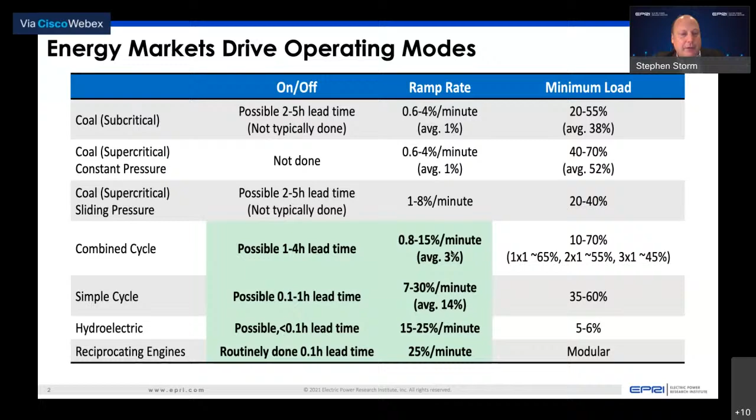So when you're looking at the energy mix in the portfolio, and if you do not have these fast start gas turbines, hydroelectric or reciprocating internal combustion engines to basically assure the grid is stable, to be able to meet those 1 to 4 hour lead times for startups and shutdowns, to be able to operate with extremely high ramp rates up and down, then we really put a lot of pressure on the fossil plants and the conventional coal plants to be able to prevent instabilities in the power grid, and how you manage those assets is very important.

The next thing I want to talk about is, again, I mentioned that boiler tube failures are a leading cause for plant availability losses in fossil plants, but the overall reliability of those plants is really influenced negatively by the number of startups and shutdowns. And a lot of those startups and shutdowns and the failure mechanisms that arise from boiler performance are at the mercy of plant operators. And so some of the common operational challenges include how you manage those high ramp rates, poor control of the temperatures, poor control of drum levels, pressure and temperature control and whatnot.

And all the damage that you accumulate on a large utility boiler is accumulative. I have yet to find any unit that was self-healing. So I think it's important to understand that all this damage is accumulative, and it's important to understand that you have to have a comprehensive mitigating strategy to prevent premature failures of major components.

So as you're going across the load range and you look at the demands on those conventional coal plants for dispatchable generation, you've got to be able to meet those grid stability demands by being available, being flexible, and that flexibility might not be online operation. That might not be how quick you can ramp up or ramp down or what your minimum turndown is, but it's also your availability after you come out of a short-term layup or an extended wet layup or a dry layup. But for these different modes of operation, there's different requirements for the plant staff. And I think it's important that you understand that each one of these modes of operation comes with a defense strategy that includes O&M activities that are critical for ensuring boiler reliability.

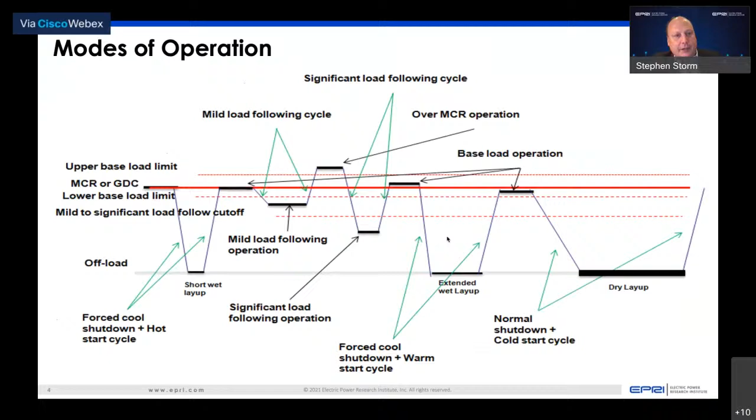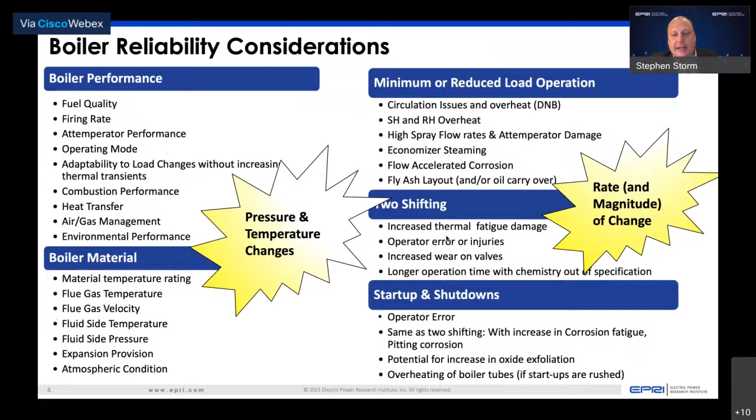So pulverized coal combustion, as anybody that knows me knows, that's near and dear to my heart. And all utility boilers, pulverized coal-fired units, which are predominant in India for generation, are fixed with a limited amount of furnace residence time for combustion to take place, typically less than 1 to 2 seconds. And within a microsecond, you release the volatiles in the coal. And as anyone in India knows, there's very little volatile to begin with. So you've got to get combustion right. Combustion is a major influencer on heat transfer optimization, and it plays a big role in operational flexibility.

So, as you drop load and you deal with low volatile, high ash coals, forced ignition points and how you modulate mills into the configuration and how you control excess airflow and issues such as air in-leakage are very important. They have very much of a negative influence on combustion, and it can not only impact the boiler, but it can impact the turbine side.

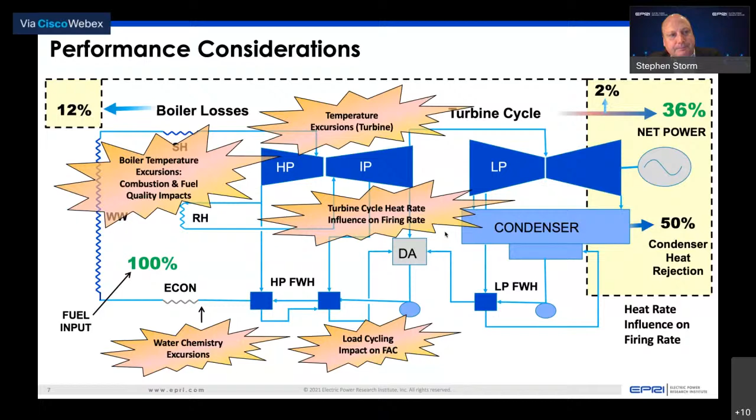So management is typically one of the top areas for control improvements. It's a very important area. Regarding pressure and temperature control, combustion and boiler performance, once again, play a big role in that. The controls are very important, but there's also a lot of subsystems. When you look at the air systems, the gas systems, the fuel systems, and how you manage those different controls that modulate those different subsystems.

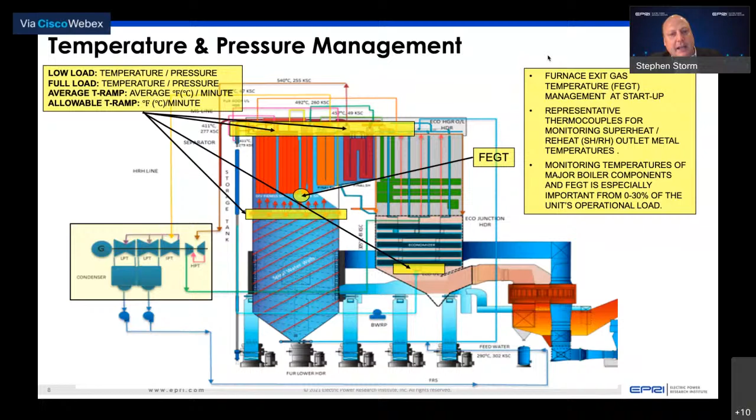And depending on the mechanical integrity of dampers and burners and pulverizers and how good of a job the firing system is doing for ensuring that we optimize lower furnace heat transfer, is going to have a big influence on the magnitude of those temperature and pressure swings, which are top drivers in regards to the life expectancy of thick-walled pressure vessels. We can see issues with boiler terminal tubes that tend to suffer from thermal and pressure-induced fatigue issues. And those issues are again related back to combustion. They can be related back to human error, and it goes hand in hand with operational best practices and how you manage the procedures as you go up and down in load.

One of the top areas, I know a lot of the Indian power plants, because of the coal quality, have struggled to operate with less than 50% load. I know there have been some burner studies where you've been able to prove for a short amount of time the ability to go down to 35, 45% MCR in my understanding, but due to shear bar wear and burner degradation over time, the sustainability of reduced low load operation is going to continue to be a challenge in India. So it's important to understand how you manage that heat release.

When you operate in that 0 to 30% load range, this is what I sometimes call the valley of the shadow of death. We have reduced pressures, we have reduced differentials on the superheat and reheat, and we find ourselves more susceptible to circulation issues or any issues that you might have with exfoliation in your U-bends or your superheat and your reheat, because overheat scenarios or flame impingement or heat flux variations in the furnace walls can result in a short-term failure mechanism. And of course, those short-term overheat situations can turn into long-term overheat or failure mechanisms that don't show up for many months down the road. A lot of those failure mechanisms remain latent for a long period of time.

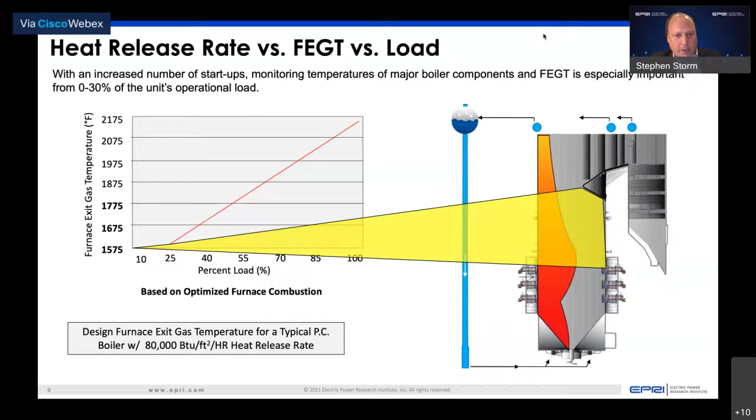So although you might find yourself flexible for a year or two, in many cases, what we've seen with large utility boilers is that over the first 2-3 years operating with high ramp rates or reduced levels of minimum load operation, you may not see DNB failures or overheat failure mechanisms show up for some time. So it's important to keep a focus on those potential failure mechanisms.

That being said, I've always been a proponent of the inputs and making sure that when you are pursuing a combustion or a boiler performance preservation program, you need to take into account the firing system, the firing system being the pulverizers, the fuel lines, the distribution, how you manage those excess O2 curves, how good of a job you're doing with representative O2 measurement at the back end. And that's extremely important at low load operation, making sure that we meet those NFPA requirements to minimize the possibilities of explosions or ash layout, issues that can have a negative impact not only on boiler reliability, but also on environmental controls equipment on the back end.

With large utility boilers cycling more often in India, and when you have domestic fuels with 40% ash coal, you already have issues with air in-leakage, with accelerated fly ash erosion on major components of refractory and penthouse seals, expansion joints, and so forth. But as you cycle on and off, and the boiler modulates as much as 6 to 12 inches or half a meter up and down as you take the units on and off, you're going to see more issues with the possibility of air in-leakage.

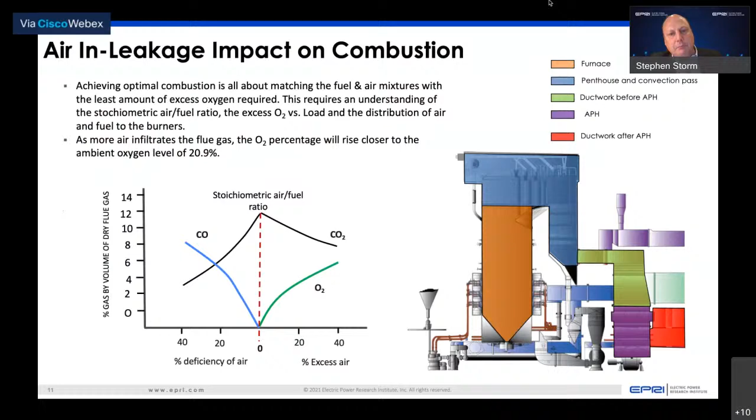And that creates challenges with meeting that load range going forward. So I think the best way to evaluate that as a best practice is to do a periodic boiler performance evaluation where you're monitoring the heat transfer on the unit. You understand when there's a shift in performance. You do periodic testing and requirements.

You understand the different materials as you go from the furnace walls to the superheat, the reheat. As you know, you're going to have material changes. And those different material changes are going to vary for your castings, your components, your boiler tubes, your refractory, the metal casings, your access doors. You're going to have different expansion rates. You're going to have different challenges for different materials.

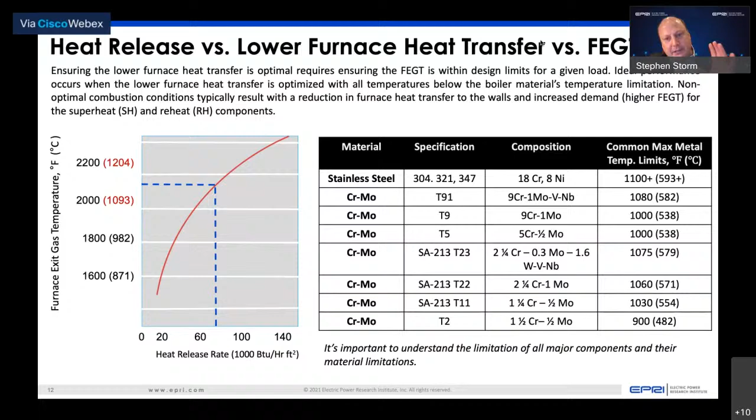So understanding what those metallurgical limitations are, understanding what your performance is, where your heat absorption path is, and then also understanding what's going on with chemistry. Understanding when you have chemistry upsets and you have tube deposition internally on the tubes, it's important to understand that startup overheating of those boiler tube components can be related back to the oxides that are inside a superheat and reheat tube, because they expand at different rates than the material itself, and so that can really drive failure mechanisms on those major components.

Starting up and shutting down more. If you have an event where you're in a peak of summer or peak of winter, India probably has more peaks in the summer than the winters because they're much more mild than some of the climates in other parts of the world. But the more startups and shutdowns that you do, if the operator runs the ID fans for an extended period of time, or if we start pulling off hatches on the boiler after you shut down and you force cool the unit, you can run into situations where you really drive condensate buildup that can create a water plug in a superheat or a reheat tube.

And then when you come to start back up, you can not only start up and have poor circulation and exceed the metallurgical limitation of that component because your FEGT is higher than the design of the tube material. But if you have condensate buildup and you don't monitor that FEGT and you don't control those gas temperatures until you evaporate off that condensate in those U-bends, then you're going to result in a very short-term failure mechanism.

So it's important to have gas temperature measurements on the unit, as well as understanding what's going on with those components. We've seen a number of issues with cyclic operation where you can have these water migration events, not only on boiler components, but also on turbine water induction. But looking at boiler components only in this presentation, it's important to understand that these rapid temperature cycles can lead to high strain ranges in borehole surfaces near the mid-wall thickness of headers, as I'm showing here.

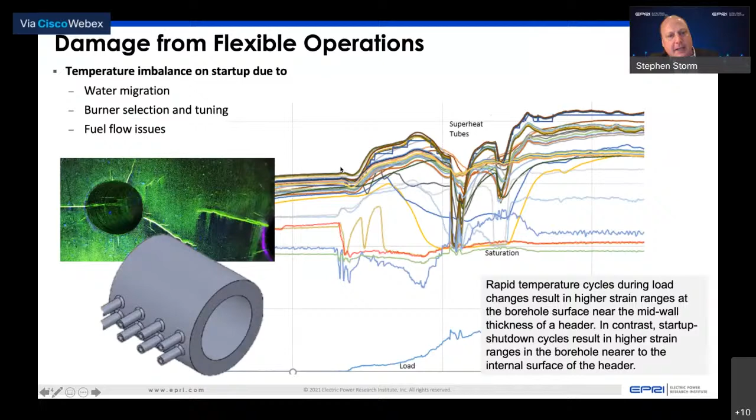And then when you're looking at life, and John and Justin may have some comments on long-term maintenance activities, but when you're trying to manage uncertainty and you've got units that are 30 or 40 years in age, there's a lot of uncertainty about the end of life of the units and what kind of damage may be done to major boiler components. In the US, it's not uncommon, if you have to do a major header replacement, for it to be anywhere from $5 to $20 million US dollars.

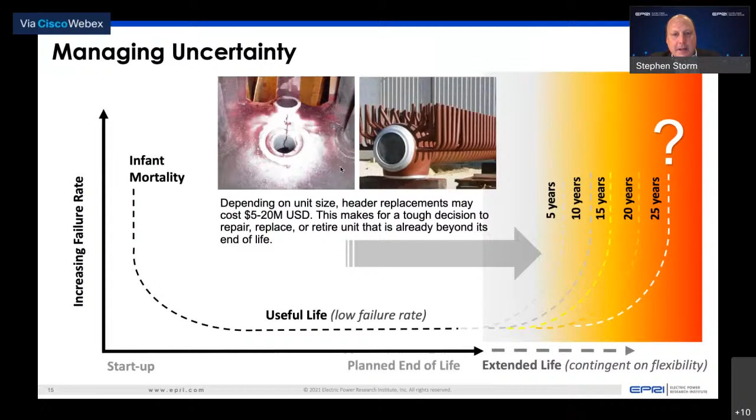And if you've got a unit that has already been through 25, 30 years of the original planned life, and it's going to only operate for 3 or 4 or more years, it may be very difficult to justify the repair cost for that failure mechanism. So it's important to understand these failures, what are all the precursors to those potential failure mechanisms, and what are all the variables that relate back to it. So I can't stress enough the importance of having representative thermocouples across the system. I can't stress enough the importance of optimizing combustion and boiler performance and having good pressure management on the units.

But all these different systems align to control the steam temperatures. On the subcritical units, these are more prone to having issues with drum level control and catastrophic damage when you drop down to reduce loads, or if you have more startups and shutdowns, you can have issues with shrinking and swelling of the water levels due to heat flux and what's going on in the combustion process.

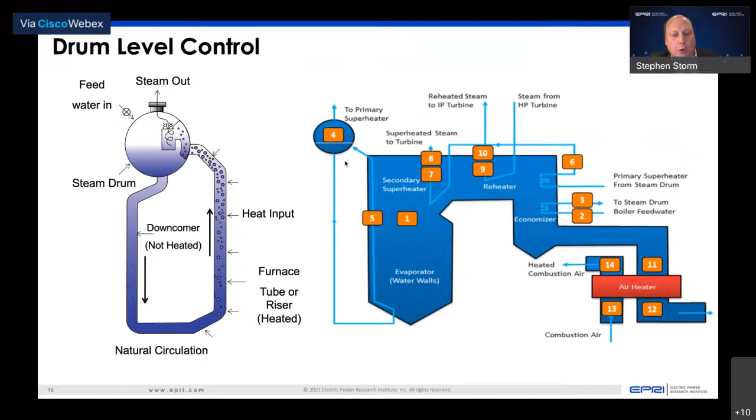So as you continue to drive closer to 50% load or even reduced load operations, it's important to understand what's going on from a circulation standpoint and how good of a job that your combustion is in the lower furnace by doing visual observations, doing periodic testing, and doing those prerequisites to be able to mitigate those potential failure mechanisms.

So when you look at something very common, when you get down below 30% MCR, we've seen a lot of issues with departure from nucleate boiling, where you have steam film formation. On top of any potential scale or deposition that you have from water chemistry upsets, you can also have a temperature differential from the film formation from having a high heat flux region where you have DNB. So it's important to understand that a lot of those failure mechanisms are related back to combustion.

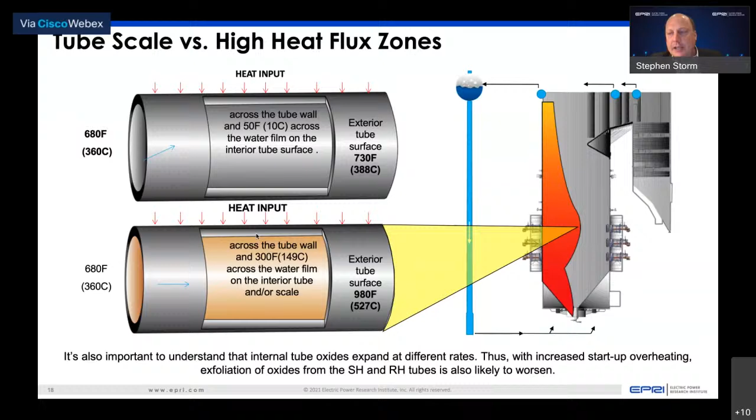And then when you look at the deposits in the tube, I'll just give an example here on a subcritical unit where you might be designed for 360C on the inside of the boiler tube. But if you have a significant amount of scale on the inside of the boiler tube, that can create a temperature differential of close to 150 degrees C, where now on the exterior of the tube surface, because you don't have the saturated steam cooling on that subcritical boiler, you might start hitting 980 F or 527 degrees C on that tube wall. And if that's a carbon steel tube, that's going to result in a short-term failure after a very short amount of time. So it's very, very important to understand those heat fluxes.

And then it's also very important to ensure that you have optimal stoichiometry at the furnace exit. Anybody that's ever done a high velocity thermocouple probe test, where you use a water cooled probe, you check the O2, you check the temperature profiles in the boiler, can attest that it's not a fun test, but it's certainly a best practice that should be considered annually or semi-annually to ensure that you've got the proper amounts of oxygen and that your lower furnace heat absorption is where it needs to be.

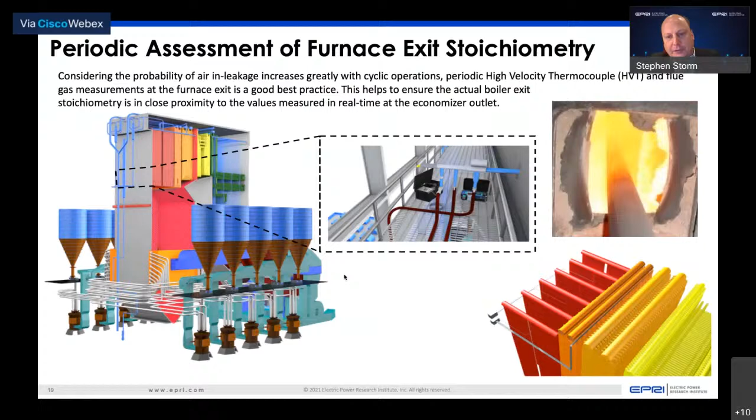And then in regards to real-time management, integration of infrared or acoustic pyrometer systems is well warranted, so that you understand any potential change in the performance over time. As you change those temperatures and pressures in the boiler, if you don't absorb the heat in the lower furnace due to air in-leakage or flame stability issues, or just poor absorption in the lower furnace, which relates back to combustion, this can drive those furnace exit gas temperatures up 150, 200 degrees C beyond the temperature limitation of the ash fusion temperature.

And then with high ash domestic Indian coals, it's also important to understand that there's an exponential impact on the velocity gradients of the fly ash accelerated erosion mechanism that relates back to those temperatures, because you didn't absorb the heat. So not only do you have to absorb more heat in the superheat and reheat to meet the turbine inlet demands for steam temperature and pressure, but you're also going to find yourself with accelerated erosion, accelerated plugging, and increased heat absorption on the superheat and reheat, which is going to shorten the life expectancy of those major components in the upper furnace.

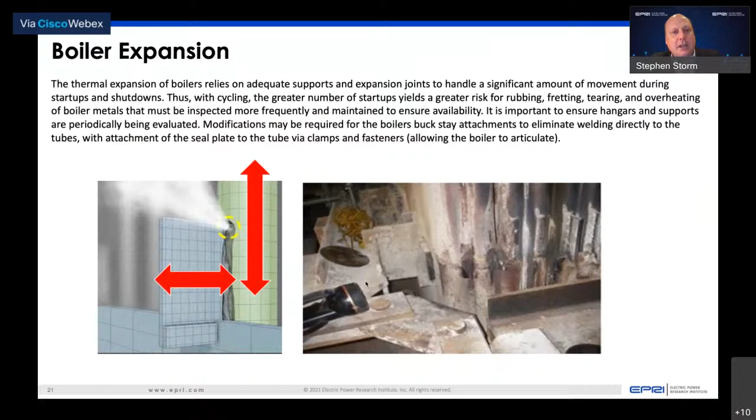As that boiler goes up and down with cycles, when the unit comes on and off, the boiler relies on adequate supports and expansion joints to be able to handle that significant amount of movement. The boiler needs to be able to articulate around buck stays. Any attachment points that are fixed or unable to modulate are going to exacerbate issues with fretting and rubbing and tears and things that result in boiler tube failures, like I've illustrated at the bottom left. But this can also relate back to exacerbating corrosion fatigue at attachment points, where you also have issues with a boiler that's, say, over 30 years old, and it's all of a sudden cycling more at low load operation.

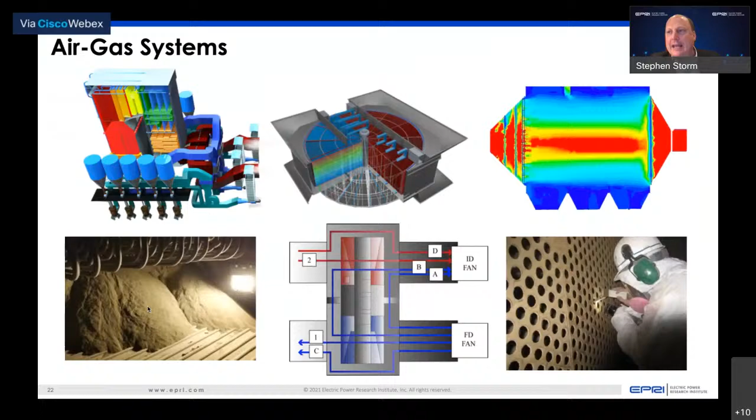So I always look at the firing system as the heart of a coal-fired unit, but I look at the air system and the air heaters as kind of the lungs of the unit, ensuring that we have good differentials, balanced pressure drops, uniform gas flows and temperatures. That's not only important for boiler reliability, but also for optimization of your electrostatic precipitators, ensuring adequate velocities to sustain ash particles and avoid issues with high ash coals like we've seen in India, where you have deposition in localized areas, whether in the upper furnace, the convection pass, or the horizontal ducts leaving the boiler. Ultimately that's going to impact gas distribution in and out of the unit from left to right side, and that's going to impact the dynamics of what's going on in the combustion process on the front end.

So I briefly mentioned... Mr. Stephen, could you now try to wrap it up? I can wrap it up.

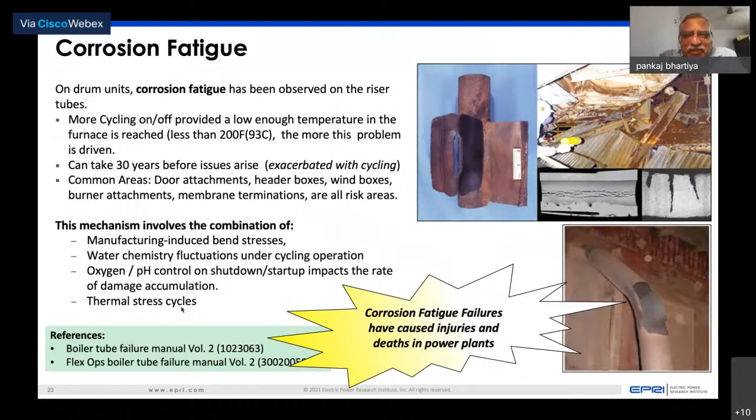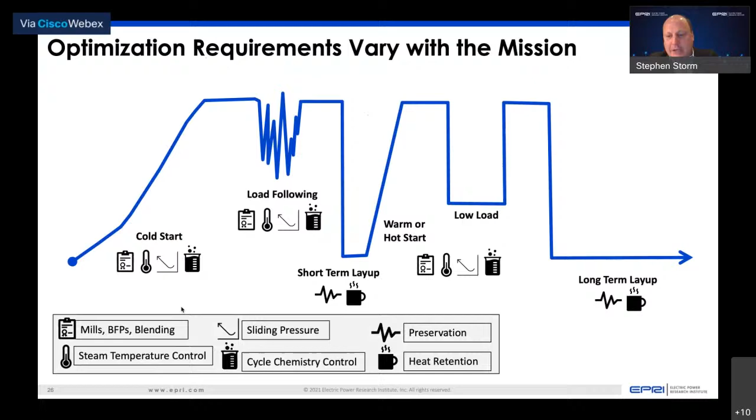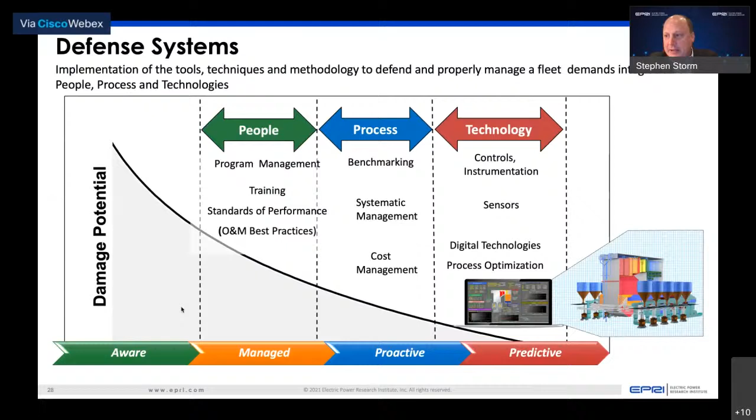So I talked about corrosion fatigue earlier. Flow accelerated corrosion is something that modulates with low load. We find ourselves more susceptible when we drop down to that 150, 180 degrees C range. And then cycle chemistry, how you manage it online and offline, is very important. So I'll wrap it up, Pankaj, with saying that under these different modes of operation, there's different requirements for each one of those modes. There's a lot of different subsystems that need to be taken into account. And it's very important to have defense mechanisms for aligning your people, process, and technologies. And I know in Program 223 this is a key focal point for us. So anybody interested in learning more, please reach out to myself or Paul Pickering, our India representative. Happy to share more separately.

Thanks, Pankaj. Thank you, Mr. Stephen. It has been a very comprehensive assessment of the Indian boilers, which you definitely have done hands-on. It is a good learning from the perspective of flexible operation. And as you rightly say, people, process, and technology all have to be put together to address this issue. The points which you have raised regarding the controls, the ramp-up rates, the metallurgy, the operation optimization, and the tracking of temperatures - metal temperatures, gas temperatures, and the fire completion temperature - these are all the major issues which we need to monitor in order to be confident about the lesser adverse effects of flexible operation. Thank you so much. Thanks, Pankaj.

Thank you. So now I would like to invite Mr. Coffey, who is going to talk on the O&M best practices. Please, sir. Thank you, Pankaj. Happy to talk to you guys today. If you could pass the presenter ball over to me, I'd be very happy with that. Mehul. There we go. Thank you.

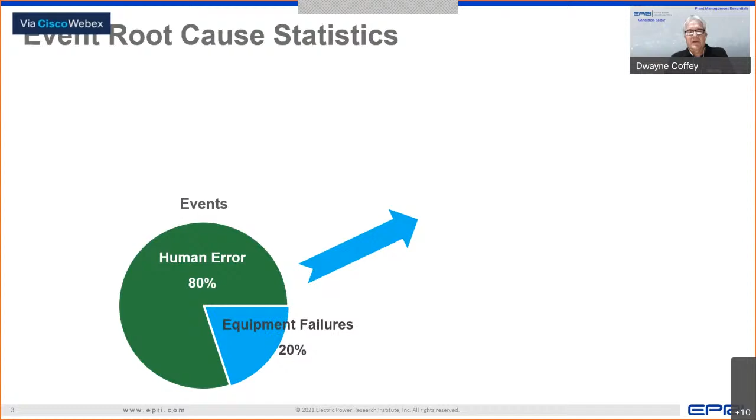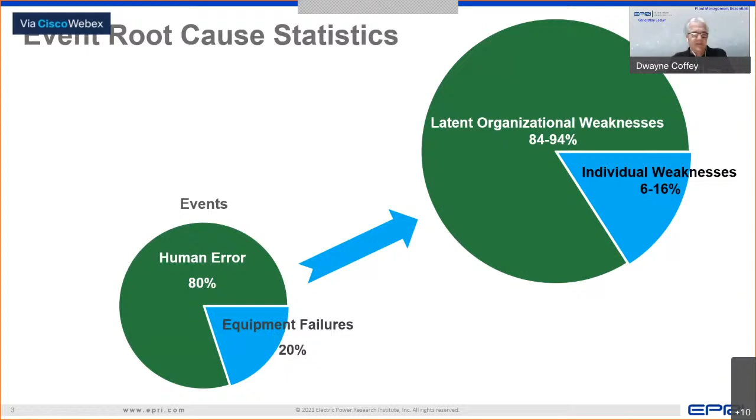A lot of latent conditions exist in these human performance situations, and that's really what we're going to talk about. If you look at industrial event root cause statistics, where people have figured out why events happen, 80% of it is human error. I know Stephen's real passionate about the boiler, but equipment failures are really only 20%. Most of these events are caused by human error. But when you look into the human error, you can't just stop at saying it's human error - you have to break that down into smaller details. And when you look at the human error, it actually evolves into this: you have latent organizational weaknesses. Your programs, your processes - those are the issues that are actually causing problems with your units. The individual human error is a very small percentage of that. So we really need to focus on the organization. The programs and processes you have in place are hugely important, because that's where the latent organizational weaknesses exist. And there's all kinds of examples - our industry is not the only one.

When you start looking at the latent organizational weaknesses, you're going to start looking at your process and programs and your organization.

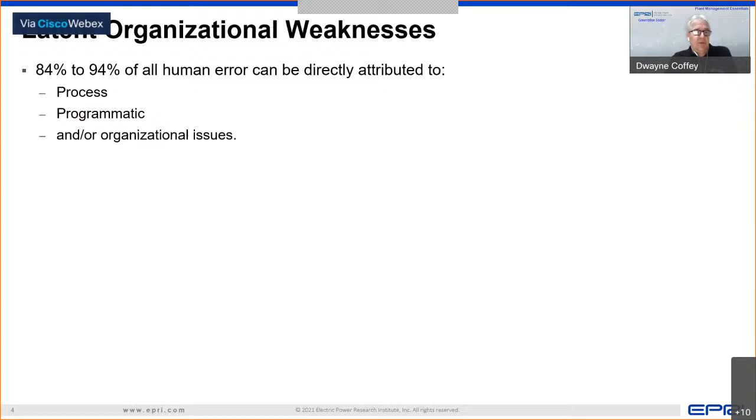In the U.S., we've had some big events of our own. The Space Challenger explosion was a latent organizational weakness.

Russia, the Chernobyl nuclear plant, obviously a latent organizational weakness. And then we've had this combined cycle plant that exploded during commissioning in Connecticut, the Kleen Energy complex, due to a poor process on your steam blows for your steam piping to clear the piping out. They were using natural gas for the steam blows just due to the environmental conditions and how they had it set up, so there was a pocket of natural gas that existed during the steam blow. It found an ignition source and exploded.

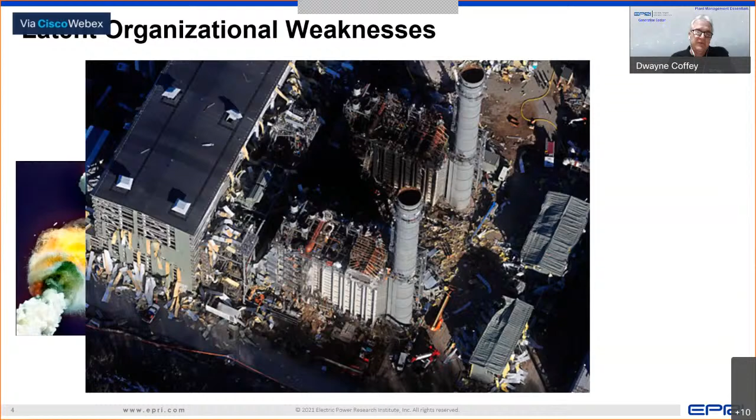My program looks at a lot of latent organizational weakness areas. Stephen talked about procedures - that's very important, one of the key opportunities. How you use those procedures, the use and compliance. We find out when we do assessments across the world, we're not as good at that as we should be.

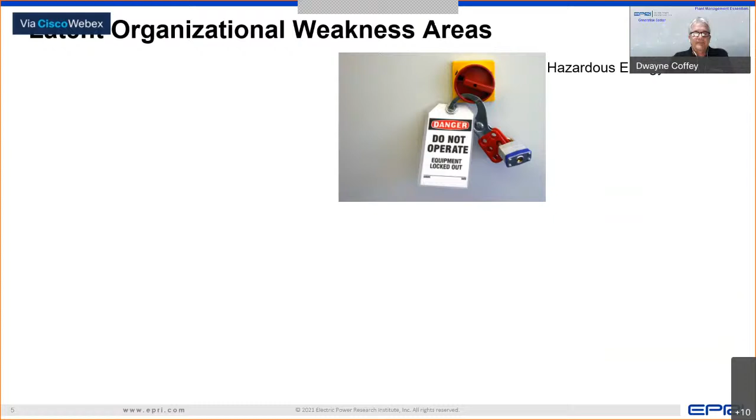Hazardous energy control, like lockout tagout. Making your operator rounds, like Stephen was talking about, the inspections of the equipment, really important.

And then we've moved into the technology, DCS. So our DCS alarm management, we find everywhere we go around the world is poor. That's well beyond what a human can actually perform. We'll talk about that, and then just a look at the graphics.

These graphics are great if you're playing a video game. They're horrible if you're trying to run a power plant. And we see these graphics everywhere. I was at a plant doing an assessment last week - they had graphics that look just like this. It's very, very poor for a human.

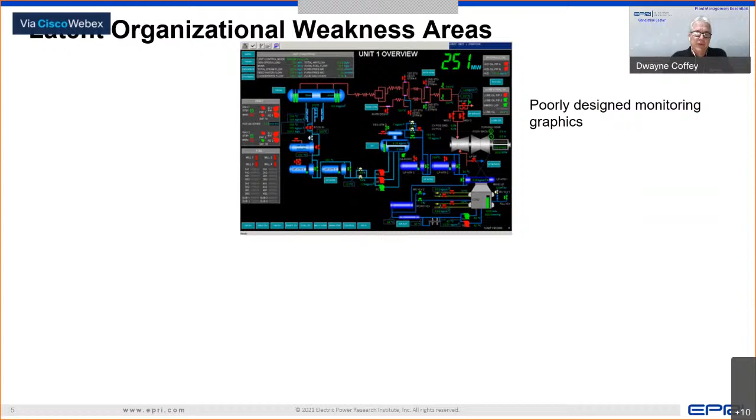And then there was about 10%, 6 to 16%, for individuals who make mistakes. So there's some tools there that we could help with those also, and we try to help the industry be better with those issues with the individuals.

So the first one we talk about was the procedures. There's a lot of errors that are in procedures because we don't train people how to write procedures - we just expect them to understand that. We train them to run a power plant, but for some reason we think everybody is born with the ability to write a procedure when they are not, and they need to be trained.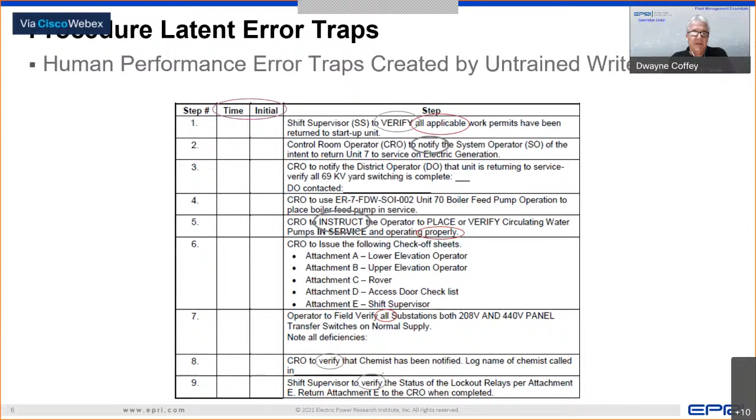So that's where they start making the mistakes. They understand what they need to do, and they're going to go out there and do the best they can, but they're not going to be successful because it's such a massive undertaking for them, and they're trying to do it from memory. They're not going to be successful.

We see this over and over again in procedures around the world: the person who writes it writes it based on his own skill level, and that may be very high, but the end user is probably just a newly qualified person who doesn't have that skill level, and he can't complete that step successfully without more information.

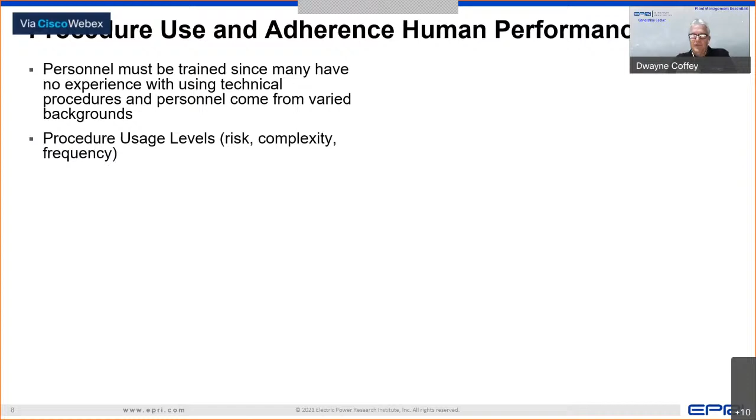We recommend having different usage levels for procedures, based on risk, complexity, and how often you do the task. There's a high level called continuous, or in-hand: that's a high risk job, very complex, and you don't do it often. Those three factors put you in continuous use, meaning I read the step, I do the step, then I go to the next step and sign it off. It's a very detailed checklist performed in a very detailed sequence, because if I make a mistake it's very hazardous to my plant, and usually irreversible—I can't back up from it.

Then the next level down is called reference. That's for things we do more often, a little less complex, not as high risk. We want the procedure with us—we may look through the whole page and say 'here's what I need to do now,' go do it, then stick the procedure in our pocket, do those steps, come back, pull it out, look at the whole next page, and go do that.

And then information is like procedures for how to fill out your timesheet, or how to do overtime callouts—procedures and processes that don't actually touch plant equipment. So if it doesn't touch plant equipment, it's not a high risk to my plant, which is why we call it information. But they're still valuable and need to be there. How to use PPE, those kinds of things are information-type procedures.

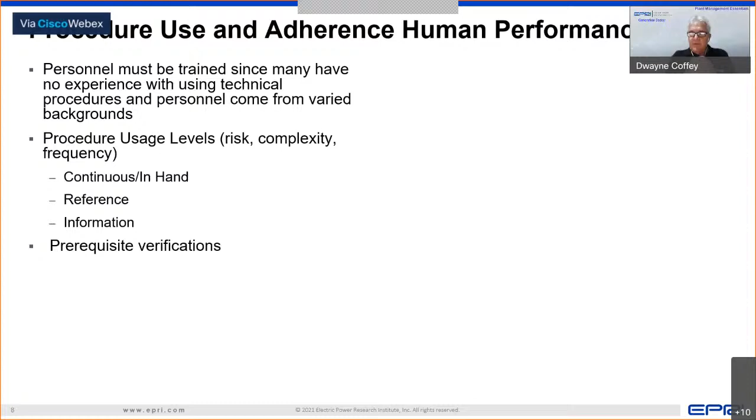Prerequisites. A lot of people get in trouble because they'll get their prerequisites for doing a process in place. Then it's break time, so they go to break and they come back and they don't verify that those prerequisites still exist. So they start right back in with the procedure and something happens. And that's because we all know in power plants, those change very rapidly. So while I'm gone on a break, those conditions could change.

And if I don't come back and verify that they still exist, and now I start my procedure without that verification, I can have a problem. And we've had multiple events in the US I can point to where we did not do that and it cost millions of dollars to repair just because we skipped that step.

You need to tell your end users what to do when things happen, like when they get interrupted, what should you do? You need to tell people if they get to a step and they can't perform it as it's written, what do you need to do? What happens when you're doing a task and a casualty occurs? What do you need to do?

And then just what if the unexpected occurs, right? What if they're working and the worker next to them slips and falls and breaks his leg? What do I need to do, right? I can't just keep going in my procedure while this man's laying next to me with a broken leg. I need to do things, right?

You have to train them on that up front, because if you wait till it actually happens, their response is going to be based on their knowledge and their experience, and that may not be what you want. So you pre-train that, so when those events happen, you have provided them a guide path for response, and it's one that you want them to follow so that you get a consistent positive result for those events. And this has to be done before they happen, not after.

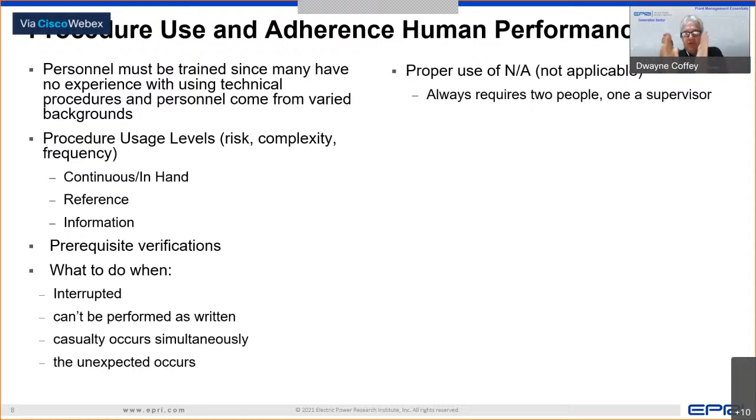So if he doesn't want to do it, he needs to talk to a supervisor and say, I don't want to do this step, and here's why. And the supervisor has that opportunity to correct that, or say, yep, I agree, and we will mark it NA. But that way you have good human performance. You have 2 people independently thinking about this step, and they make a decision together on where to go.

We talked about placekeeping. When you get interrupted, you forget where you are. And some of our checklists and procedures in power plants are pretty long. So placekeeping is really important. One of the things that's really interesting, I ask people in meetings and conferences, how long on average for a person to get back to their original thought pattern after they've been interrupted, which is really surprising to a lot of people. So you think maybe 5 minutes, maybe it's 12 minutes, right? Well, maybe it's 15, or maybe it's 3 minutes.

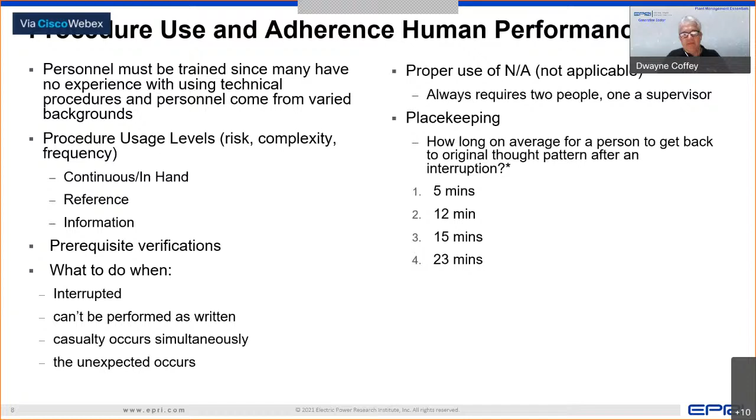And if you look at the University of California, they've done studies, it's actually 23 minutes. So if you interrupt someone, for them to get their mind back to where they were before you bothered them or interrupted them, it's 23 minutes on average. So that's a big impact to someone performing a procedure. So try not to interrupt them when they're doing procedures, and make sure those people are doing placekeeping, because they're going to forget when they come back if they're not. All this stuff is in a procedure writing guide from research we've done across the industry.

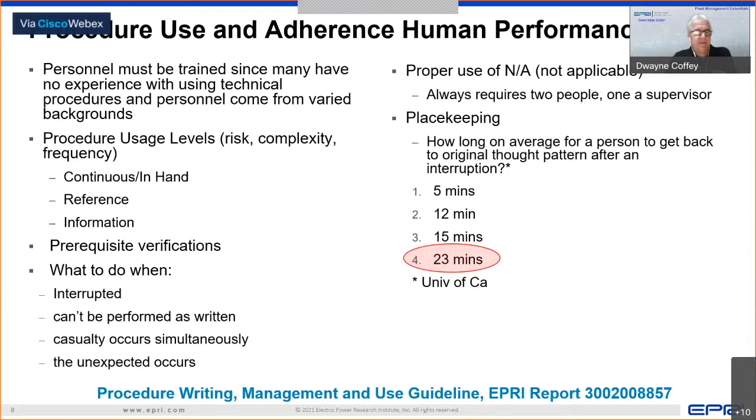So again, we're setting our end user up for failure. This is a huge latent organizational weakness. Labeling, our equipment lists, and things like that not matching causes a lot of events. Definitely in this case with hazardous energy control, you can kill people very easily making mistakes like this.

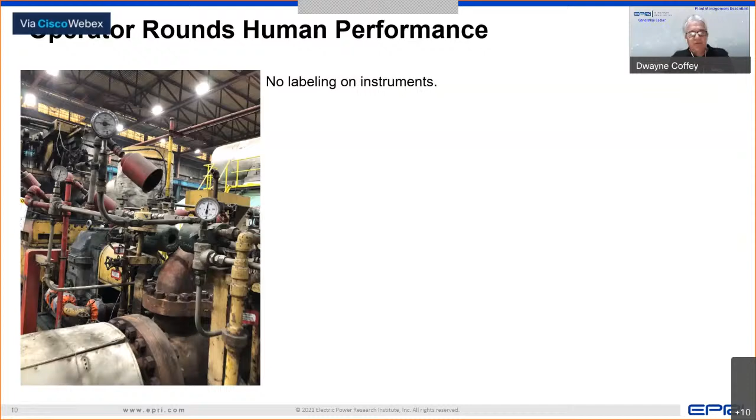We talked about operator rounds, things that we see are different that cause human performance errors. There's no labeling on instruments. You want the operators to take readings, but you don't tell them which instrument. If you look closely, you will see that on the instrument, someone has written with a marker number 1 or number 3 down here at the lower right on that gauge. The upper gauge is number 2, and they had to do that on their own so they could figure out what readings they need to take, because there's no labels on this equipment.

What about sensory checks? If you look around in the general area here, are there water leaks? Are there oil leaks? Is the lighting good? That's not mentioned on their operator rounds. The general area conditions. Look at the piping. Do they have insulation where they've done a repair? They put the insulation back.

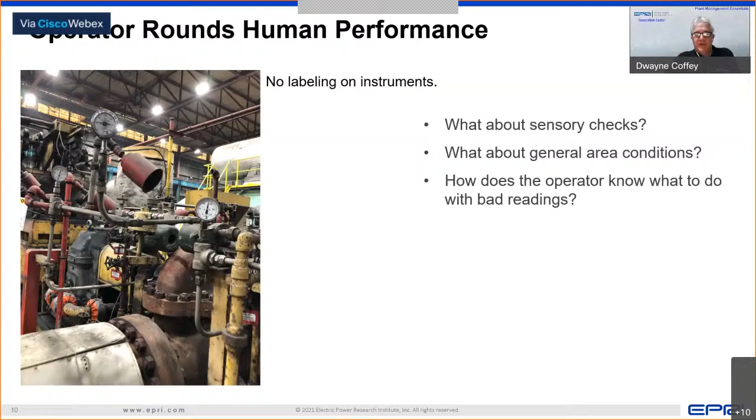How does your operator know what to do with a bad reading? Right? Have you trained them? What do you want them to do? Do you want them to call a control room? Do you want to notify a system engineer? Do you do the same readings when the unit is shut down? Steven's talking about in India, when plants start cycling, what are you going to do when the equipment is shut down? Do you want the guy to do time on these rounds when the equipment's off?

Probably not. Are they required? Do they change when I go into seasonal layup? If the plant's off for a period of time, do I still need to do the same readings? I doubt seriously that you do. And then when I finish the readings, what do I do with the round sheets? If they're electronic, that's usually a better thing, but if they're manual still and they're using paper, what do you want us to do with them?

Then we talk about DCS alarms. This is where we let technology get in advance of humans. And we did a really poor job with DCS. We still do. One of the first things that you got to worry about is we all have to agree what an alarm is. And we have a definition that's pretty much an industry standard. If you look at IEEE, they use the same definition. It's a signal to the operator that informs him an event has occurred or is occurring that requires an operator to take action. I'll just jump to the endpoint. If it doesn't require an operator to do something, it is not an alarm. It needs to go somewhere else.

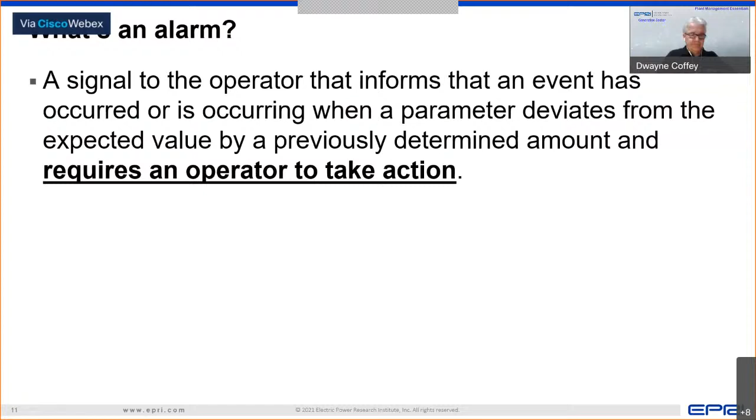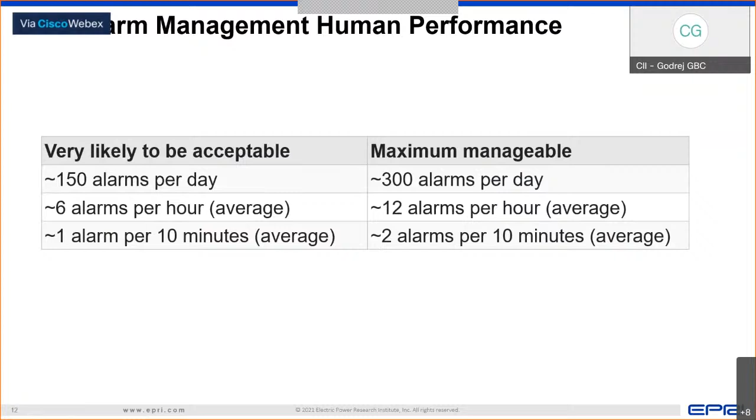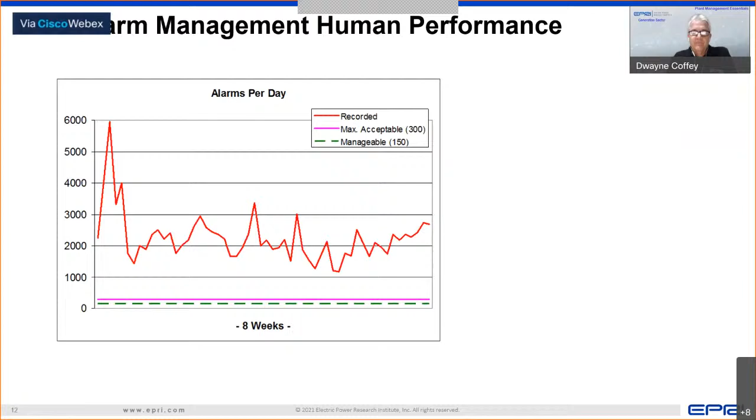When we look at alarm management, how many alarms can a human actually handle a day? It's about 150 to 300. If your alarm count for the day is higher than that, your operator can't see any more than that. It's just physically impossible for a human. Here's an alarm count when we did an alarm management study with the utility. Notice where it is, somewhere above 6,000 sometimes, but it never drops below 1,000. Your plant is less safe with DCS than it was with the old bench board annunciators because the alarm count is so high. It's physically impossible for a human to respond to that many alarms.

So when you get past that alarm count, your operator's head basically explodes, not so much, but he goes into a performance mode called cognitive load shedding. What that means is the operator, based on his training and his experience, is going to pick what he thinks is the most important alarm, and that's what he's going to respond to. That may be good, that may be bad, but that's the best he can do. And that's because we set him up with too many alarms. So we've got to manage those. We've got a couple of documents that help with that. It's a continuing program. We see it all the time. And it takes a lot of effort to get your alarms under control because they're digital alarms now and you can add them so easily.

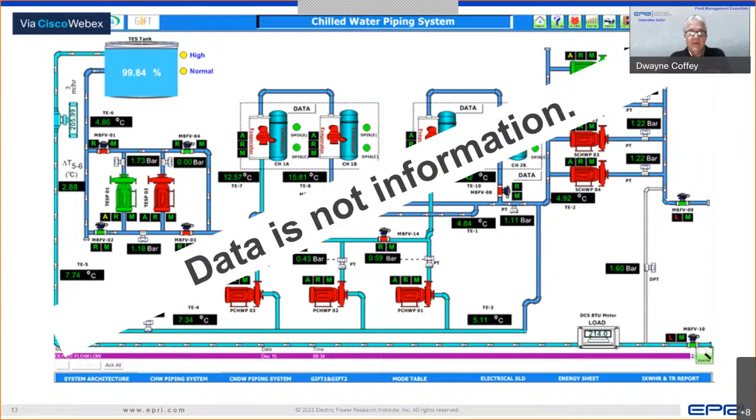It's not possible for a human. And then if you look at the other part of that is the color. Color, we'll talk about that in just a minute, really quickly. So what kind of data and format does your end user need?

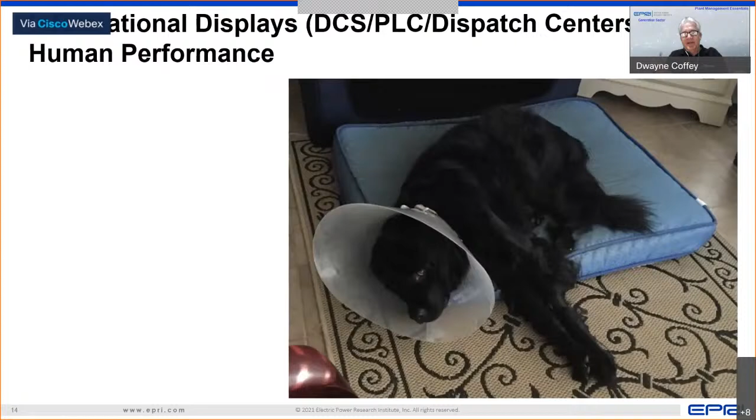This is my dog. He was sick one day, but you know, the vet gives me something like this. It says, here's his blood test. Well, that doesn't help me any. That's a bunch of data, but I'm not a veterinarian, so it doesn't help me. It would be better if he gave me this, right? Now I know I can look at the blood test and I know the range. So I got an idea if my dog is healthy or not based off his blood.

But I can make that even better and make it more visual. So when you get a higher degree of situational awareness, and even better is if I put those ranges there and instantaneously I can see if I'm good or bad.

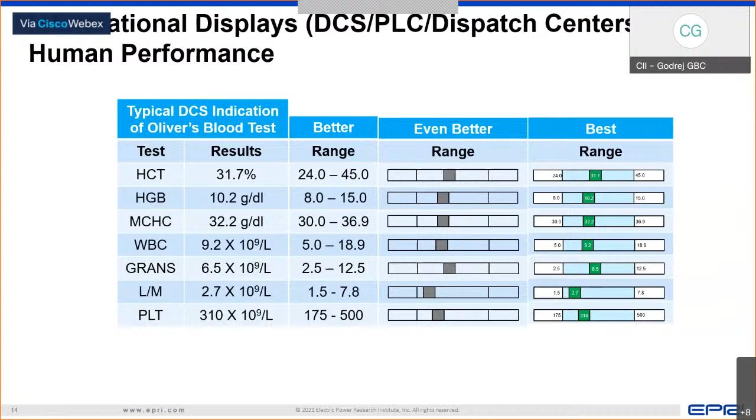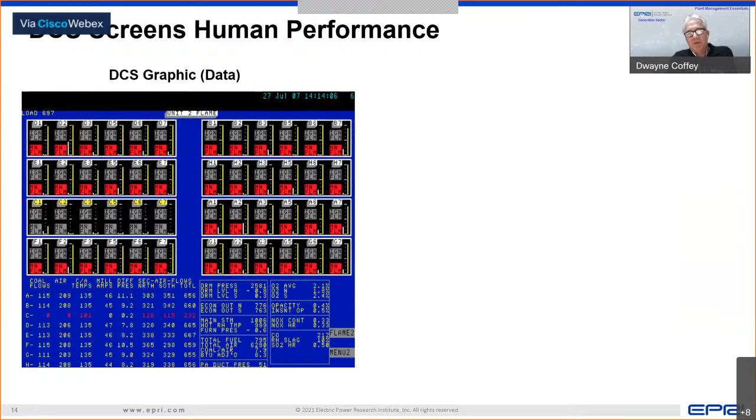The screens, if you look at the screens, this is a pulverizer screen, 4 graphics. We recommend what we call grayscale, and here's the same screen put into what we call grayscale. And the reason I talk about this is the color draws your eyes. There's so much color on this screen, nothing can come in that you would see very readily. If you use grayscale and any color appears, it pops up really quickly to your eyes.

No problem. If you look at the coal flows on the pulverizer on this side, this is what we were talking about, data. Here's all those values, and you can kind of do it on the grayscale screen. You can just glance at it and instantaneously see issues. You don't have to be an expert at that plant, but you can look at it and have an idea of how that's deviating on some of those pulverizers.

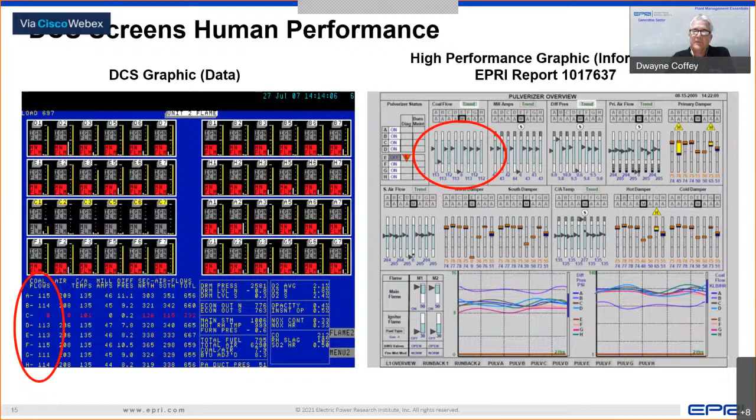So wrapping up, we have some technology for human performance. A lot of plants are moving over to tablets and pads out in the plant, but we're also working on hands-free devices. To the right there, the helmet you see is a head-mounted tablet. We're working on augmented reality procedures, QR code scanning, remote subject matter expert. Operator rounds and a CMMS, putting all of those things on this mobile device so that your operator is better equipped to work in the field.

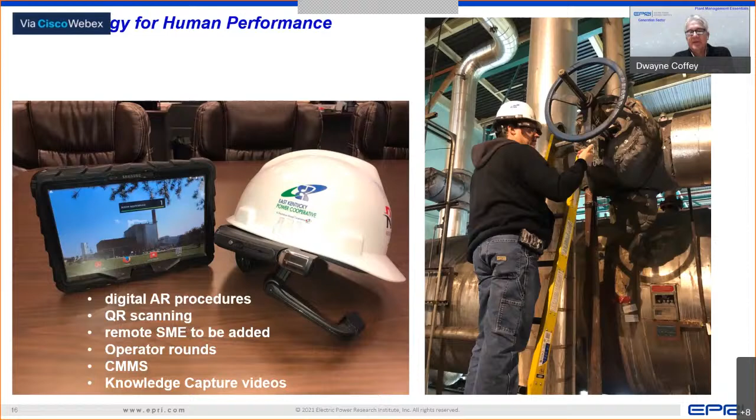Here's an operator at one of the plants we were working at where he's up on a ladder and he's using the head-mounted tablet. It's voice controlled, so his hands are free. He has a hand so he can get up there, and he's looking at a plant tag. It has the description, the plant equipment ID on it, but on the back side it has a QR code, and he can scan that with his head-mounted tablet to verify he's on the right component and where the position should be.

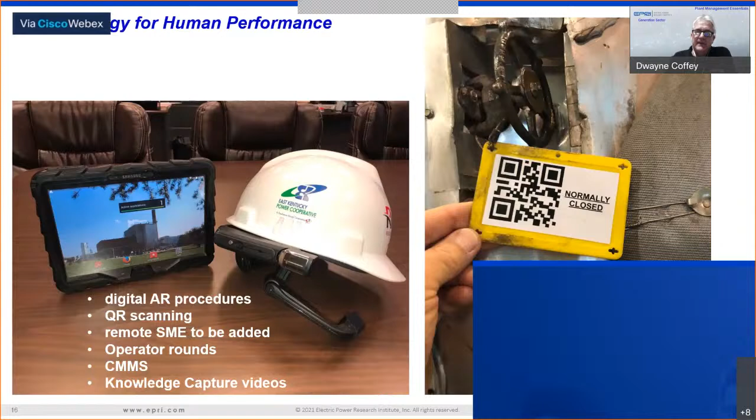So you have dealt with a very important part of the process. Technology is one part, but people are even more important than the technology, and they manage the technology. And various things which you have stated are the procedures, the operator rounds, the DCS alarms, and the trending graphics, and empowering the people with the tools so that their job is done with more efficiency and ease. So these are the issues which you have mentioned, and I think they are very important to be followed in our procedures. Thank you very much.

So now going to the next speaker. Yes, sir. Now, I would like to invite Mr. Jeong Kim and Mr. Justin Thibault on leveraging low-code business intelligence tools for fleet reliability and cost optimization. As you know, low-code technologies can create intelligent solutions with minimum use of code and can generate, store, and analyze data as well as integrate them with third-party software. So it's going to be very important. Please, sir.

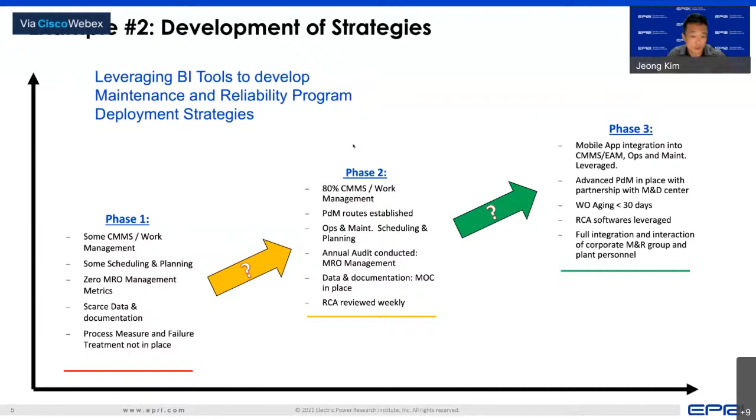So the last example I'm going to show you is the benchmarking and statistical insights. So Justin is going to expand a bit more on this and show you some real life examples, which will be very exciting to see. But this is actually one of the things that we're currently working on in my program, and it's a very important project for us because folks are looking at EPRI for industry knowledge. And so what we're doing is we're compiling some of the asset management metrics across the industry, and then we want to benchmark it, right?

Who's doing the best in managing CMMS? Who's doing the best in managing spare parts inventory, and also who's executing their work orders the best, and so on and so forth. So those are the benchmarking that will be powerful for the industry, because that will set the standards, and that would again measure so that they can improve, so that the whole industry can improve.

And then the statistical insights. So one example that we're currently working on is we're compiling millions of work order data that were received from the other utility companies who are our members. And we're just not staring at it at the screen and saying, wow. What we're doing is we're data mining it, we're organizing it, and then performing some advanced statistics to look at things like probability of failure of certain important or critical equipment.

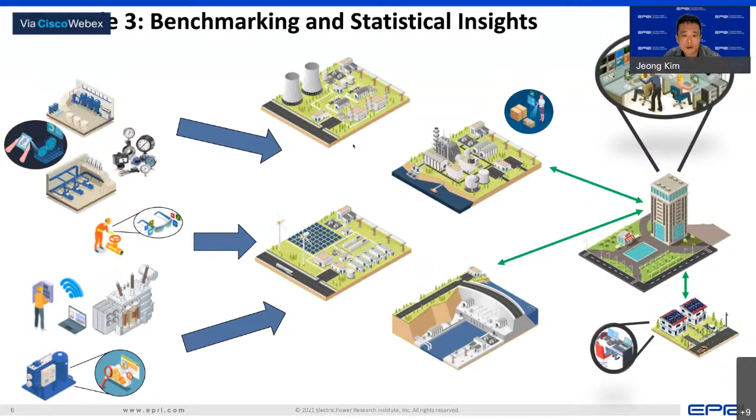All right, so I'm going to turn now over to Justin Thibault. Thanks, Jeong. I appreciate that.

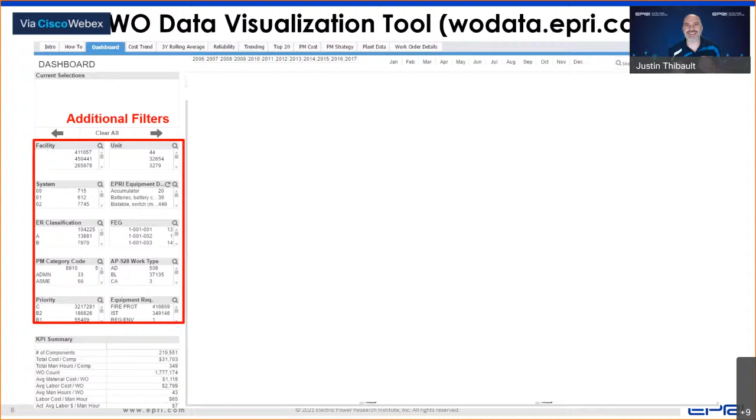Most of what we're doing is not very sophisticated data science. What we are doing is we're looking at the fundamentals. So through filtering, both through direct filtering and also drilling down, we're allowing those in the business to do a lot of the work that we're hearing that data scientists are doing. And that's really important, because when you bring these data science tools from the domain of the data scientist to the people in the business, you leverage that domain expertise.

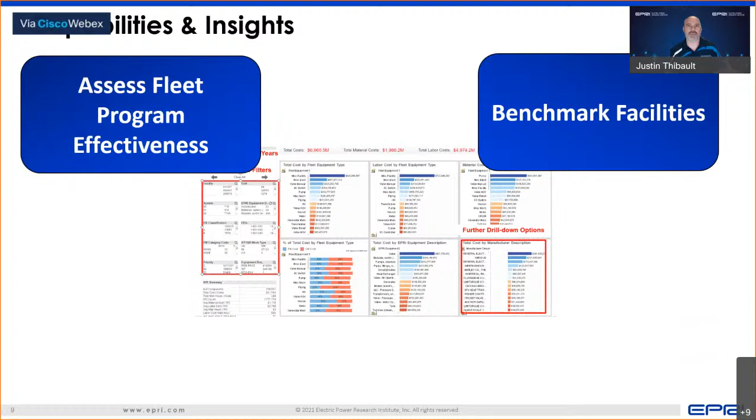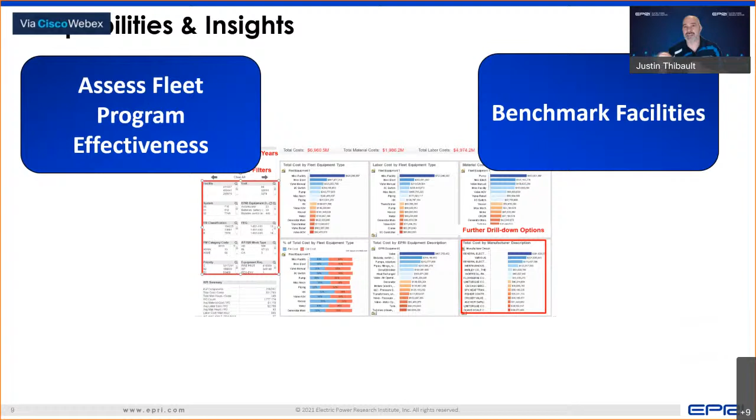And the results we've seen is, first off, you're able to assess fleet program effectiveness. All right, so people who understand what is going on in those programs, what the cultures are, that sort of thing, they're also able to see what the downstream effects of those are. The next thing you're able to do, you're able to benchmark facilities, and I'm going to show you that in just a moment. In that you're able to look at facilities of similar types and compare their performance.

Now that's overall insights, but you're able to dig into data. One thing we find, and you may find this at a lot of your facilities, is that different departments have what we call like hours dumps, or they have somewhere where people commonly charge, and looking over a long period of time, you're able to find those patterns without having to use any sophisticated machine learning or advanced data analytics techniques.

Also, you identify your data barriers. Talk to any data scientist, and they'll tell you they spend most of their time dealing with data quality issues, data wrangling, data cleansing. Through using business intelligence tools, those data barriers become very prevalent before you have to go give this to the data scientist. So what you're able to do by utilizing business intelligence tools upstream, is you're making your data scientist more effective.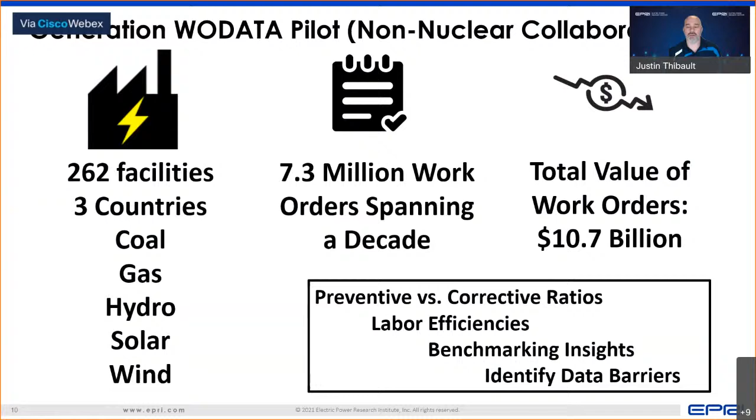So what we did on the generation sector is that we took this infrastructure that Nuclear developed, and we put together a pilot. So this pilot involved about 10 different members. We had 262 facilities, 3 different countries. You see the various different types of fuel types there. And total value of the work orders we have there is $10.7 billion. And we were able to give some very quick insights to these members without having to utilize a lot of resources. And I'm going to actually show you very quickly a demonstration of that.

So we have a utility here, and they have multiple regions. They're a large utility here in the United States. Of course, we've anonymized this, so we're not going to be using plant names. We'll be using plant numbers. And we're looking over a 6-year period here in one region. And we notice that you have these top 3 facilities. So what I can do very quickly is I can highlight those. All right, so I'm not having to go in and do the data wrangling at the command line. I'm able to use this graphical interface, and I noticed that these facilities make up actually still most of these costs that I had for this overall region.

Now, what I know about these facilities is that they tend to be a little bit older. Stephen Storm talked before about keeping the boilers up and running, and that you have a lot of uncertainty in your costs. So we know that capital expenses come up a lot. And maybe I want to optimize a little bit more of what Dwayne was talking about with the O&M. So what I can do is very quickly click on these capital costs and then come in here and exclude them. Now, what I'm going to find is that when I'm just looking mainly at my operational costs, again, OpEx versus CapEx, I noticed that facility 48 is a very strong performer. Now, I've got a lot of analysis tabs here that I can go take a look at. We don't have time to do that.

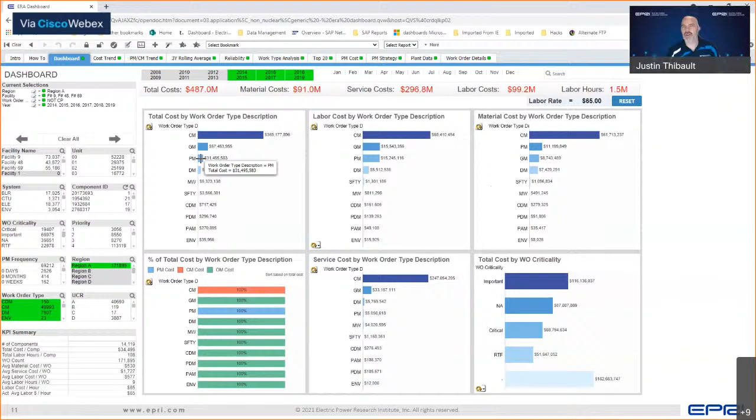One of the things I want to do is hone in on maybe a cost that I can control. So I'm going to come here to the work order type description. I still see that I'm spending a lot in what's known as corrective maintenance, but I can control PMs. So I want to see if there's a difference in the PM programs. Again, same company, same region, almost the same plant type, so I shouldn't see a lot of variation in my PMs.

So when I come back here to facilities, I notice it does tighten up again. But what I notice is that facility 48 is still the lowest cost facility. Now, if I were just looking at one number, I notice that they do spend the most money in labor. So if you were doing just a spot analysis, you may miss that.

And that's the importance of using business intelligence tools, and like Dwayne had mentioned before, really thinking about the human factors involved and what a business analyst is going to go look at, because a business analyst can see that even though facility 48 had the lowest overall cost, it also had the highest labor cost.

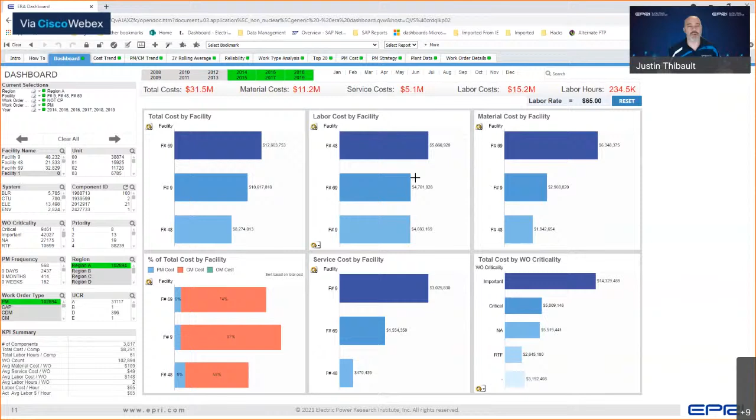So I also know from before that when I take out capital expenses and I'm just looking at OpEx, facility 48 is the best performer. So I'm getting all these insights, I want to figure out what's going on. So what I'm going to do here is come into cost trend, and I can see here that there's different variations.

And if I want to dig in a little bit deeper, what I can do is actually send this to Excel. So I can go from this tool that looks very broadly to something I'm a little more familiar with. Now, just to save some time, I actually did break down each one of these facilities. Remember before we had facility 9, facility 48, and facility 69.

If you look here, facility 48 isn't always the lowest cost facility when you look year to year, but what you can tell is it actually has the lowest variation. So what you know about that is that particular program is not only providing lower total OpEx results, but it actually has the lowest variation of cost when it comes to preventative maintenance spend. And that's one thing I can control.

So when I'm looking at benchmarking facilities just inside of my own company, I might go look at that particular facility and find out what it is that they're doing that maybe other plants aren't doing. What type of behaviors do they have? You're able to hone in on that.

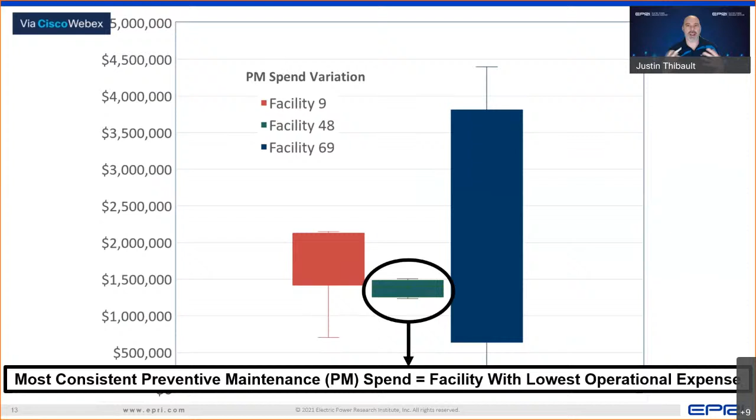Again, this whole time I haven't gone in and done any sort of very sophisticated machine learning analysis, that sort of thing. Now, there's different parts of the institute that does that. Again, I've taken that 20% of the effort and gotten 80% of the results.

So what does this mean to you? Well, we're taking this from a supplemental this year and we're moving it over into the base program, the 224, which is the program that Jung Kim manages.

So as you see here, this is the overall member process. What we do is, just starting on the left, we agree on our goals. We move into what's known as an onboarding discussion, so we find that group of the team that's going to be working on inside of our WO data environment, and then we work with them to build out - we start with a standard view, and then maybe do a little bit of customization based on the insights that they're looking for.

So how long does the whole dashboard development process take? Well, we get the initial data from the member. In about 2 weeks, we do what's known as a data profile. If there's any changes we have to make to that data, maybe it isn't organized in a way that's going to give us the insights, then we just go back to the member. What we found is that we don't have to cycle as much as we thought with a lot of our generation members.

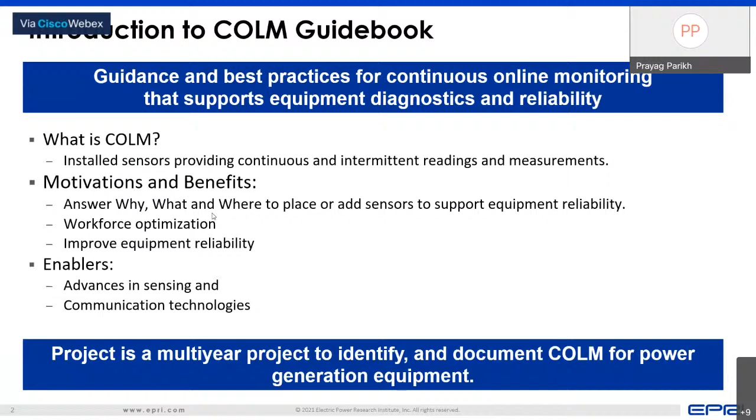Continuous online monitoring guidebook volumes 2, 3, 4, and 5 address questions related to the development of a business case for a centralized analysis center, operations and management of those centers, staffing requirements, as well as how to sustain funding for that center.

COLM can also enable advanced pattern recognition type of software and some advanced analytical type of software as well. Continuous online monitoring guidebook volume 6 discusses some of the current state of diagnostics, as well as provides some example technology providers out there which can perform some of the diagnostics using advanced analytical methods. Volume 7 discusses example APR models using existing sensors, as well as example APR models that we can use with additional parameters derived from additional sensors that we install using continuous online monitoring equipment specific guidebooks. I'm going to talk about volume 7.

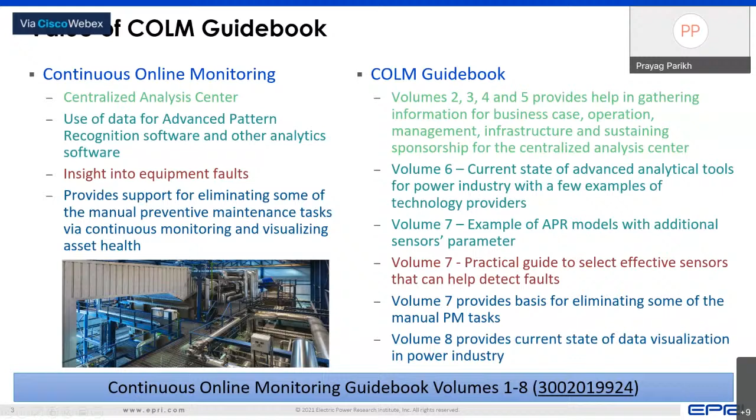So at the bottom is the deliverable. That's one of the products, and it's linked - this is the number for that particular deliverable, the Continuous Online Monitoring Guidebook. I'm going to go through various volumes and some of the things discussed in those volumes.

Volume 2 of the guidebook goes through the discussion regarding business case development for a centralized analysis center - what would be the estimated cost, what would be the potential benefit out of continuous online monitoring, and how to communicate this value to leadership. These aspects are discussed in volume 2.

Volume 3 of the COLM guidebook goes through program implementation and change management plan, and how to develop a charter for the continuous online monitoring program.

What are the various governing documents that we need to create? A program organization - who would have what role in this program?

One of the very important aspects of any digital transformation is involvement of information technology and cybersecurity team members at the very beginning stage of the project. We have to include IT and cybersecurity team members at the very beginning. If we fail to do so, the project will either stall or get canceled, just because any digital transformation type of project will require their help.

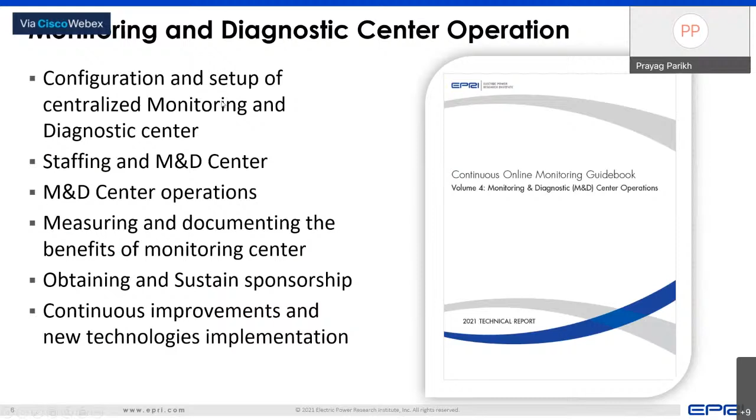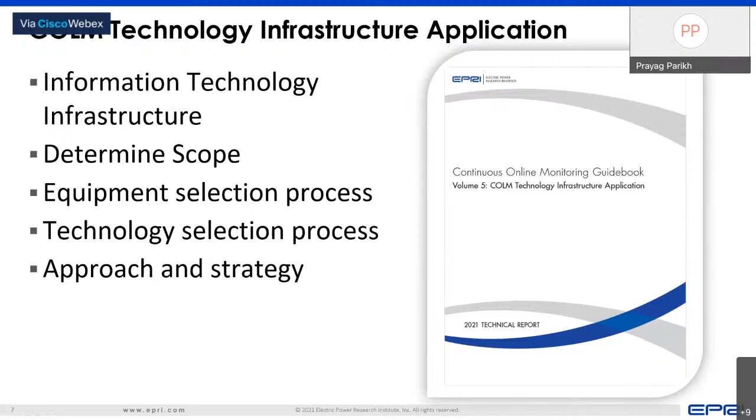Volume 5 is focused on infrastructure selection - various equipment selection, technology, and software selection process, and how to go through that process of selecting the equipment and software needed for this center.

Volume 7 of the continuous online monitoring guidebook provides guidance on selection of additional sensors for various power plant assets. The goal of Volume 7, the equipment-specific continuous online monitoring quick guide, is to reduce the number of manual preventative maintenance tasks using continuous online monitoring sensors.

So how do we decide which sensors to use? We work with subject matter experts from EPRI as well as the power industry, and also use EPRI's preventative maintenance database, PMBD. This database has information regarding various failure locations, degradation mechanisms, and degradation influences. We go line by line for each failure mode and ask subject matter experts various questions related to sensor selection.

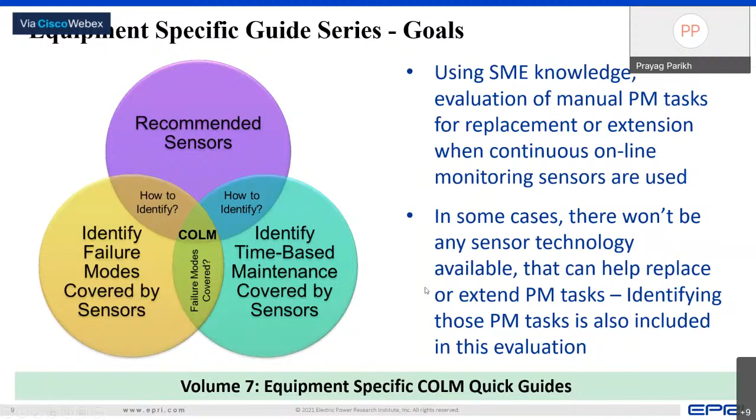The equipment-specific guides are generally 8 to 10 pages long, and we intentionally kept it that way so it's easy to digest. One of the important things in this equipment-specific guide is the ideal sensor layout, as shown on this slide.

This particular page shows information regarding a generator step-up transformer. It shows various sensors that can be installed on the GSU in the table on the left-hand side. The approximate location of various sensors is shown using bubbles on the picture of the transformer on the top right-hand side. The bar chart at the bottom shows highest value sensor to lowest value sensor, which helps us identify which sensor we want to install first if we have a limited budget - which sensor would be most valuable to install on that particular asset. That type of guidance is provided in Continuous Online Monitoring Quick Guide Volume 7.

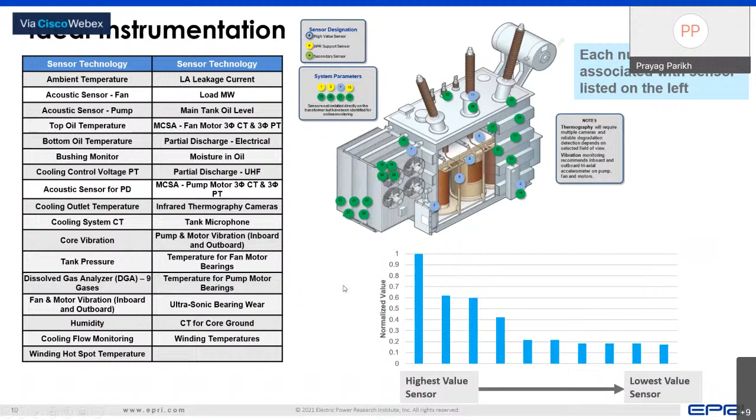All right, so I kind of skipped.

I talked about volume 2, 3, 4, 5, but I kind of skipped volume 6 and went on to volume 7, just because volumes 6 and 8 are related to some of the technologies that we as the power industry don't have long experience with. So volumes 6 and 8 don't really discuss best practices as the other volumes do. Volumes 2, 3, 4, 5 go through various aspects of continuous online monitoring and talk about best practices, but for volumes 6 and 8, because we don't have enough experience with those particular types of new technologies, we don't talk about best practices at this time.

Volume 6 of the continuous online monitoring guidebook discusses the current state of diagnostics as well as some examples of advanced tools that are available out there. Again, we don't have much experience with that, but those are the tools that are available to us if we want to test them and explore those tools.

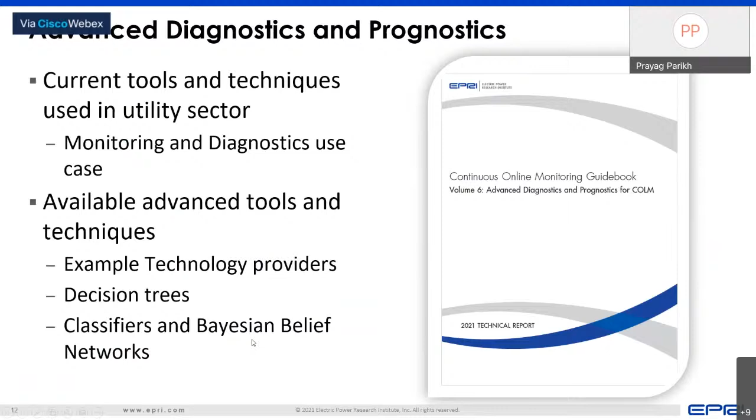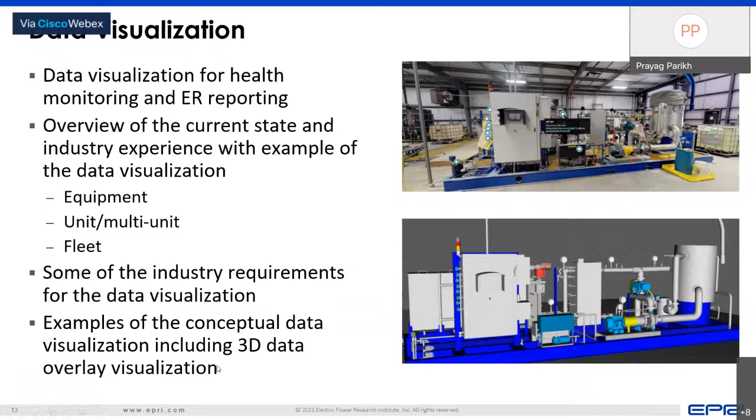Volume 8 goes through the discussion regarding visualization tools, so the current state of the tools for equipment, unit, and fleet visualization. It also discusses some of the visualization requirements based on industry discussion. And again, similar to volume 6, it also provides some information regarding some of the advanced tools that are available out there. So with that, I think I finished on time. Any questions?

Yeah, thank you, Dr. Parikh. It has been very useful information regarding this continuous online monitoring manual. I think the concepts you have discussed in it are very much applicable to the industry today, and hopefully the participants would like to go into more detail to incorporate these concepts in their power plants. Mr. Mahul, do we have any questions listed?